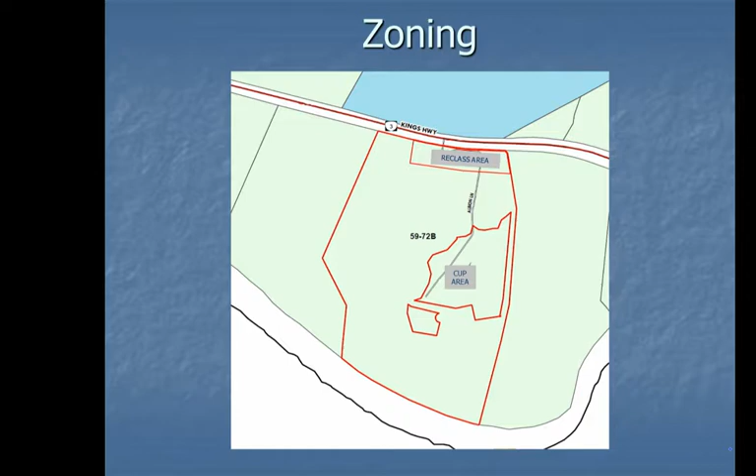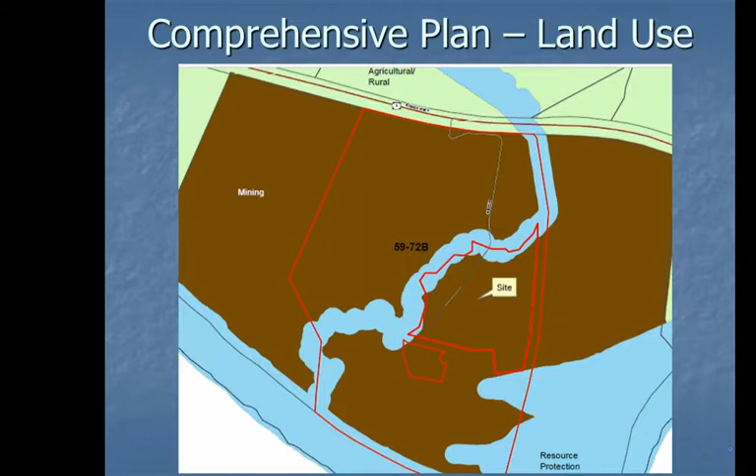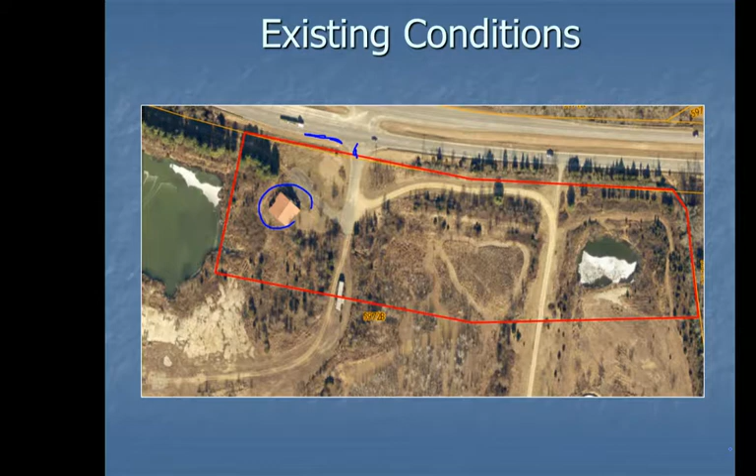Specifically with regard to the reclassification, this is a zoomed in view showing the existing entrance. Again, it's a commercial entrance that was constructed when a use was associated with this office building on the property. Kings Highway has a right turn lane into this primary entrance, and also a left turn lane for traffic coming from the east, along with internal access drives serving portions of the property for the sand and gravel mining.

You do have an existing retention pond on the site, the rezoning area site associated with the mining operation. Once the mining areas are reclaimed in the future, that pond is proposed to be filled in as the need for it goes away. The building I circled to the left of the property was constructed back in the 90s, and it's been vacant for quite some time, but they plan to reuse it for an office use.

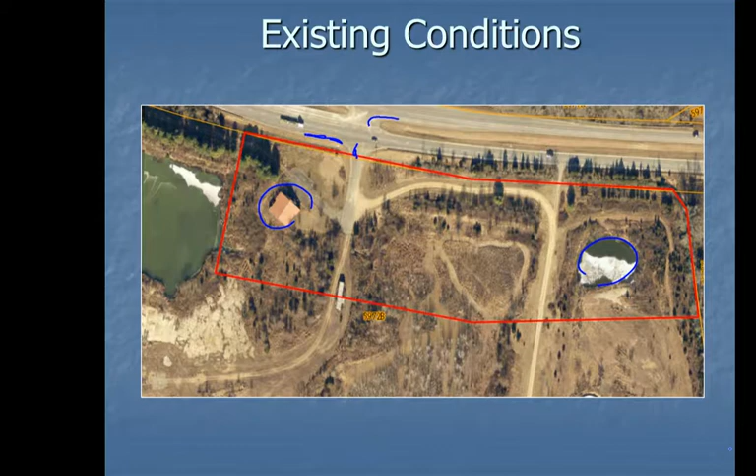I should have sent you this question, so if you don't know it, it's okay—how far is the closest well to this proximity, or is everybody pretty much on county water? I do not know the answer to that. Okay, so we'll have to look into that—maybe the applicant knows.

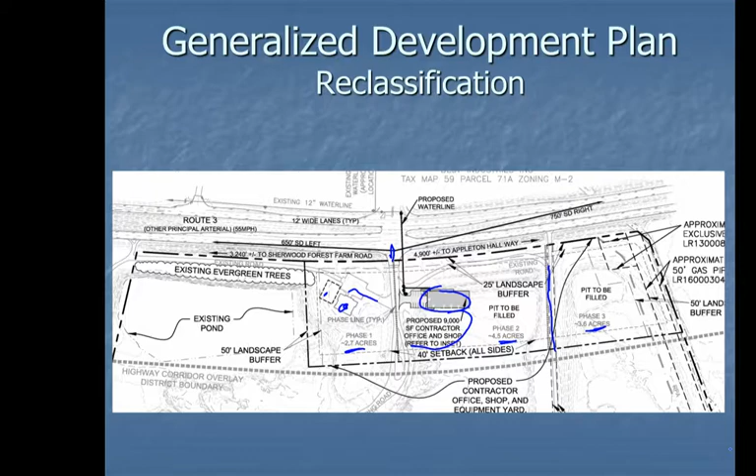One thing to note, the Albion Lane that cuts through the property, because you can't have residential access going through your industrial property, that road is going to be realigned with new access to the property to the rear and to the cemetery associated with the property.

There are several proffers the applicant is proposing, including the phasing of development, which will tie in with the timing of the mine's reclamation. The hours of operation are 5 a.m. to 8 p.m., or 9 p.m. during daylight savings time. It would be limited to 2 entrances, with the main entrance aligning with the median break as the primary access point. It would be proffered that no industrial or commercial traffic would use the secondary entrance, Albion Lane, which would instead provide alternate access to the residential parcel and the cemetery.

They're also proposing a mix of existing and proposed evergreen and deciduous trees along Kings Highway and the site perimeter, retaining those existing evergreen buffers, and screening any outdoor storage from Kings Highway.

The building would incorporate specific materials and colors, and the signage would have similar materials, colors, and designs. These would generally comply with the neighborhood design standards and the highway corridor standards. The building would also comply with fire protection requirements, and there would be an automatic defibrillator, or AED, within each building. The lighting for the outdoor storage areas would be directed away from the adjacent property and the highway corridor.

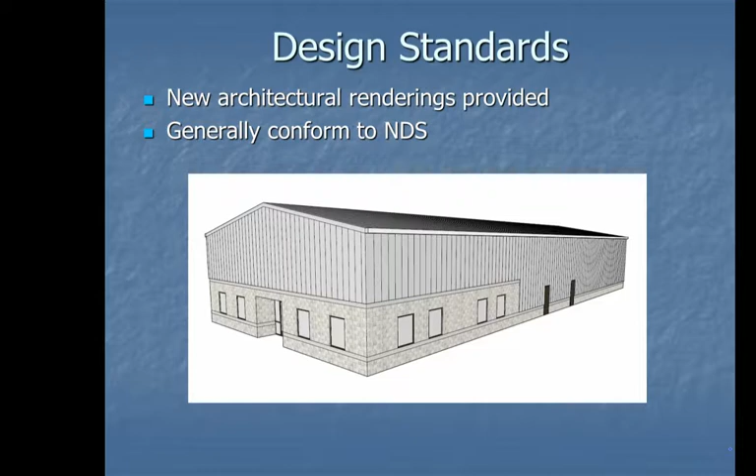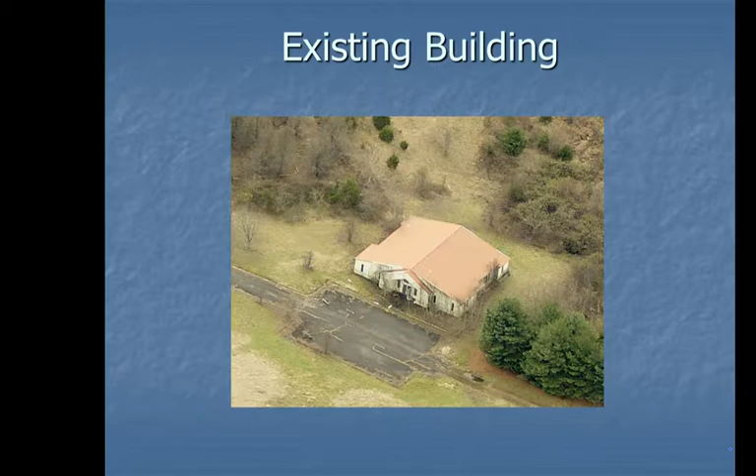Regarding public facility impacts, no impact analysis was required for this. The proposed development would have a maximum of up to 102 vehicles per day, with 9.6 a.m. peak hour trips and 10.2 p.m. peak hour trips, based on full development under the M2 allowed uses. The primary site entrance would be located at the median break, with turn lanes coming both eastbound and westbound. Utilities would connect to public water with a private drain field.

We find that the rezoning is generally consistent with the land use recommendations. The mining and extraction relates to M2 type uses, even though this use isn't specifically related to mining and excavation. It's consistent with the adjacent mining operation, and the architectural treatment of the building is consistent with the neighborhood design standards. We feel the proposed proffers would help mitigate any potential impacts.

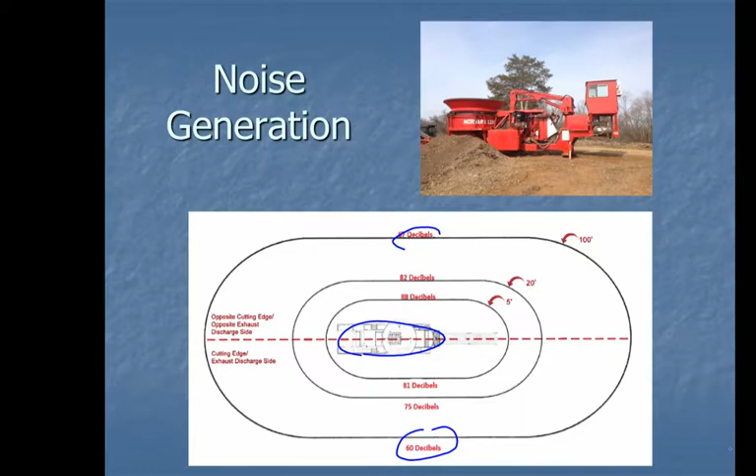The proposed conditions limit the areas as shown on the GDP with fencing of those areas, limiting the operation to one grinding machine being in operation at any time. In the instance there might be more than one grinding machine on site, there might be an instance where the machine breaks down and they bring in another one to replace it. So we're not actually going to limit the number on site, but the number in operation.

The hours of operation would be 8 a.m. to 4:30, Monday through Friday, with the mulch sales extending the same hours into Saturday. They would maintain the permitted noise levels under the ordinance. Again, the grinding machine would be no closer than 200 feet from any occupied dwelling.

Madam Chair, I have a quick question. Is that the storage of grinding machines, or is that an operating grinding machine? I'm sorry, could you repeat that? Is that for the grinding machines, no closer than 200 feet from dwellings? So they wouldn't even be able to store the grinding machine for temporary use within 200 feet, or would it be an operating machine? It would be the operation. Operation of a grinding machine within 200 feet. Correct.

Correct. Okay, you may want to make that clarification so that the opportunity exists for them to store it. Thank you. Okay, yeah, I will look at that.

The trucks are going to be limited to the primary site entrance and not the secondary, since that one is designed for trucks. The residential and cemetery access will be relocated, and then fencing would be provided around the cemetery in accordance with the ordinance.

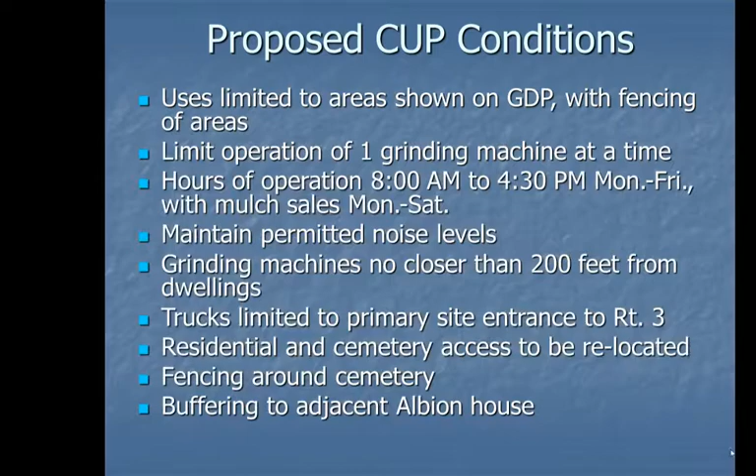So here's the house, and it would actually be realigned coming from this direction. It's going to the adjoining property, which this owner actually owns. And then the cemetery access would continue on from the same owner, continuing straight here.

Okay, thank you, that showed up on the large GDP. I guess I did not include it for that, so it would go outside the limits of the industrial area. Okay, thank you.

So let me see. Madam Chair? Go ahead, Mr. Randall.

Have we looked at the request? You mentioned that you had talked to this owner who had written this letter. She makes some suggestions on what she would like to see in that buffering area. Does that meet the county's requirements? Are we able to accommodate her request for the different types, or is she okay with whatever we put in there, as long as it's buffered?

She specifically stated evergreens and deciduous. I wanted to make sure that was within the county's code and that the county was okay with following her recommendations by her letter.

This isn't technically a requirement for the buffering because of the separation from the conditional use permit area, since it isn't abutting her property. So this would be more of a voluntary buffer, not necessarily following our required buffers. Okay, if that makes sense. Did I state that? Yes.

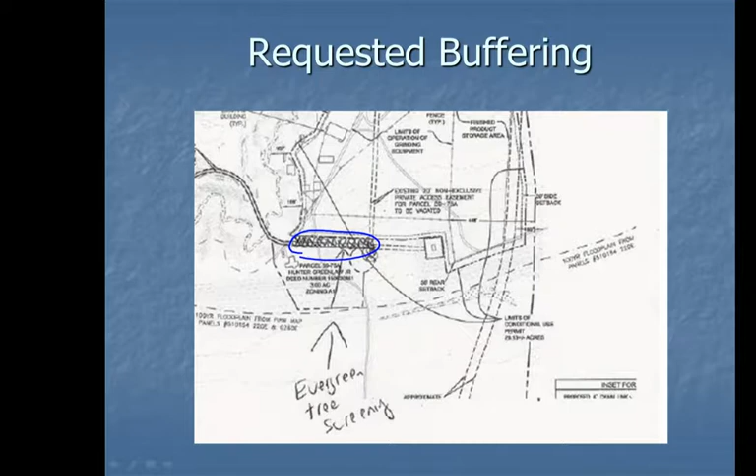Generally the same impacts for the public facilities, other than there are no utilities required for this conditional use permit area. And then, again, the same general findings that staff would recommend approval with the conditions, and if you choose to modify the conditions to include that buffer, we can work on some different language while the applicant is presenting.

Sorry to interrupt, this might come up during the site plan review, but will they be required to have silt fencing surrounding the entire mulching or tree grinding area? Or will there be any sort of erosion control maintenance during the entire operation?

I don't know, that's a good question. Do you know, Jeff, what would be required? Commissioner Bain, Madam Chairman, typically erosion control fencing is employed when there's land disturbance. In this case, you're going to have piles of material. There's no requirement that I'm aware of for an erosion control fence adjacent to a pile of mulch or some other type of material.

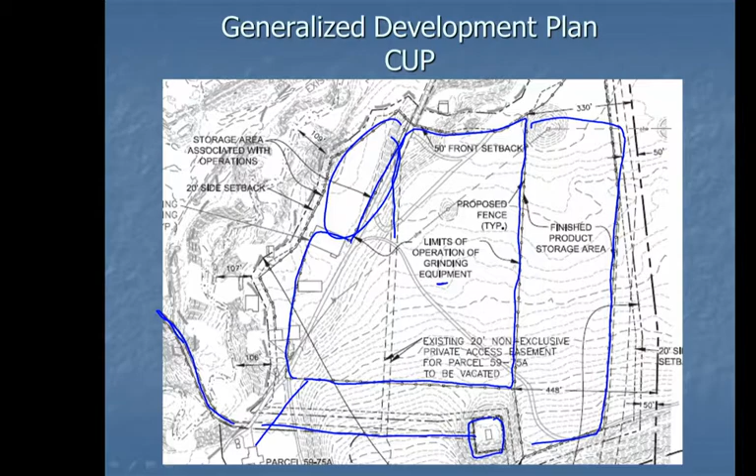Okay, if you would like it, you'd have to add it as a condition. I'm not sure. Mr. Apicella, to that end, can you pull up the visual on the site? And what's the distance of the mulch piles to the river? Let me go to... I'll have to pull up the... one of your first slides showed the river pretty good. That one.

Again, I don't know what the topography is or the slope of the parcel. Is there a concern, Mr. Bain, about heavy rains washing out into the river? This is actually a big knoll that goes along this area. I know that it's going to slope. This area sits lower, obviously, than that area. That's the floodplain down there, up here, because it is the floodplain area.

I'll have to look on the plan and see what the distance is, but I don't know how much. They can address it when they come up. Let me get to what your concern is potentially. I don't know what the potential pollution might be.

Might come from a pile of mulch, probably not much. I don't know, if you look at other landscape yards where they sell mulch, often they have them in their own containers, separated by type of mulch. There's one just down the highway, as a matter of fact, so they may have an answer for you.

Alright, okay, should we let the applicant come up? Alright, would you like to come on down?

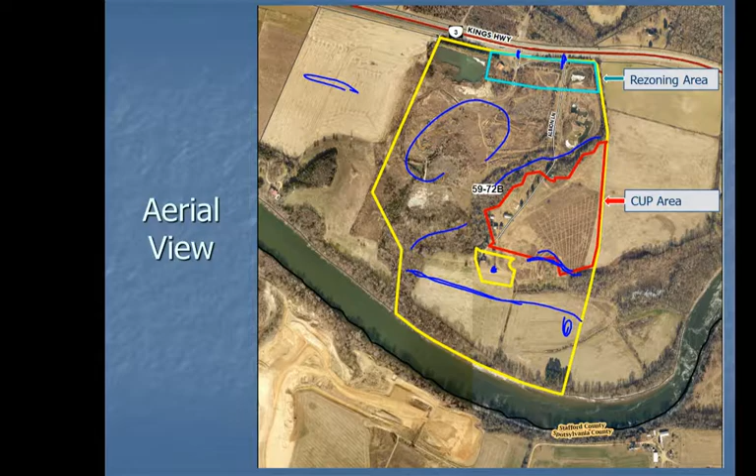And you don't feel obligated to represent any of the stuff she already showed. But I have to show that I did something to get paid. That might not be good now. I may have said too much already.

Hi, I'm Sherman Patrick, I'm with Compton and Duling. I'm here this evening representing Sisson Excavating. They are 35-year residents of Stafford County. Mr. Sisson is in the back of the room with Victor DeBoard, whom you may also know as a longtime business person in the county.

The subject proposal, if I could get the slides, is in fact 181 acres, the entire property we're looking at. That property has been used for quite a long time as a sand and gravel quarry or mine. I tend to say quarry because that's more descriptive, people understand that a little better. So they've been taking sand and gravel from the property. A number of different entities have operated it over this whole life of the project. The mine, the quarry activity began in 1961.

It did involve actually 3 parcels, or what are now today 3 parcels, and they showed up in the long-range land use plan map.

You saw this parcel, the 181 acres, that's being subdivided or will be used in part for rezoning and for the conditional use permit, and then there are parcels on both sides of it that have also been used for the same use. Those other two parcels have already been reclaimed and are back in agricultural production. This property would be reclaimed as part of the process of developing the industrial use that Mr. Sisson is now proposing on the very front of the property.

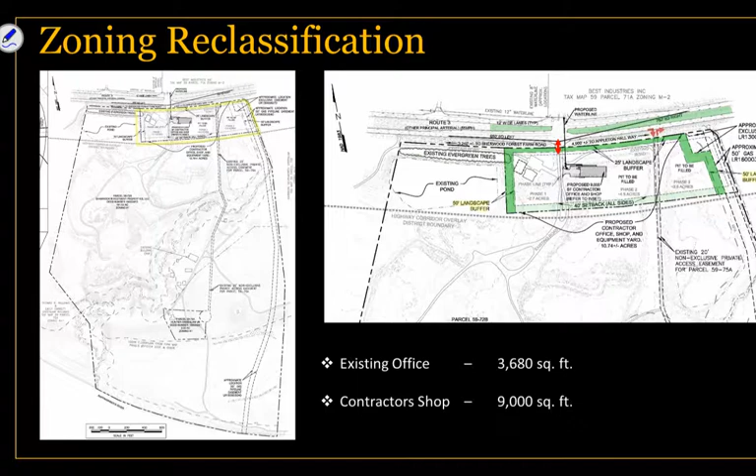These are the two buildings that'll be on the industrial property: the existing building—the aerial view is the same as what Kathy had shown you—and the proposed 9,000 square foot building.

The building is oriented so the overhead doors are on the back side, and you won't be able to see them looking toward the building, although there'll be a pretty heavy landscape buffer in front of it anyway. This entrance you see with the brick around it is actually the main entrance into the site and would be facing east, facing west.

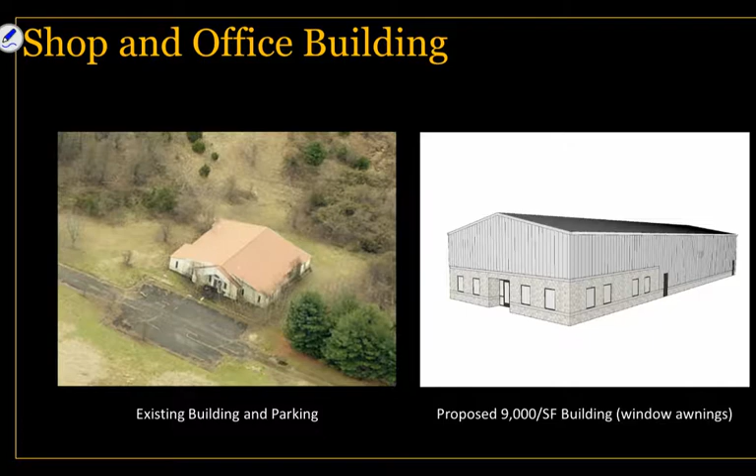We have it listed as Hunter Greenlaw Jr., that recently transferred, I believe, to his sister or another family member, and it's Ms. Williams. That is the property we've been talking about that would require some additional buffering and landscaping under the special use permit, additional conditions that were requested earlier.

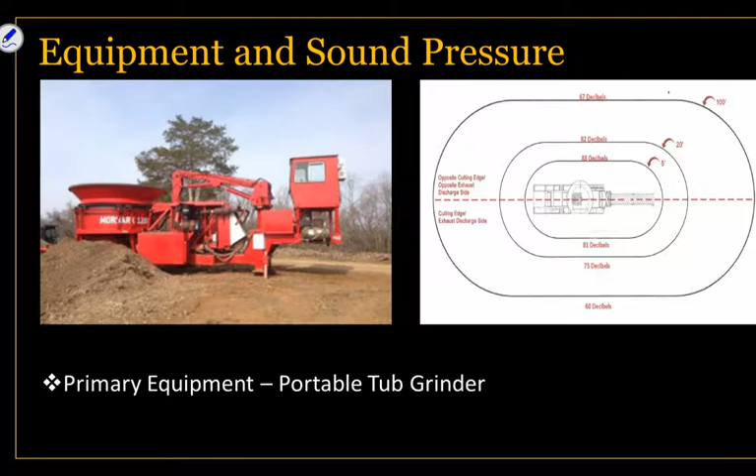A siltation and erosion control role or function in its own right. I tried to touch on each of your questions. If there are any other questions, there was one other about the distance to the well. The only well I'm familiar with is on the industrial property already, and that well would be replaced by the public water. I'm sure there's a well on the Greenlaw Williams property, so that is some distance from the mulch operation. The other residents are pretty well removed from the site itself.

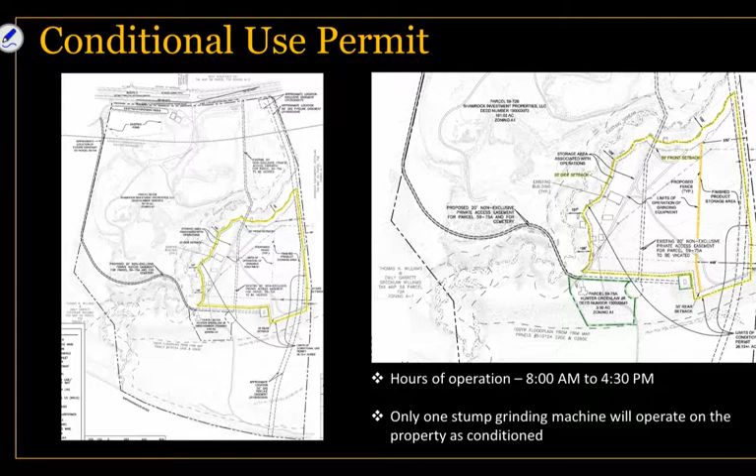If you have any questions, I would be happy to try to answer them. Any questions on this side? Any questions on this side? No? Okay, then I think we're good. Thank you. Thank you.

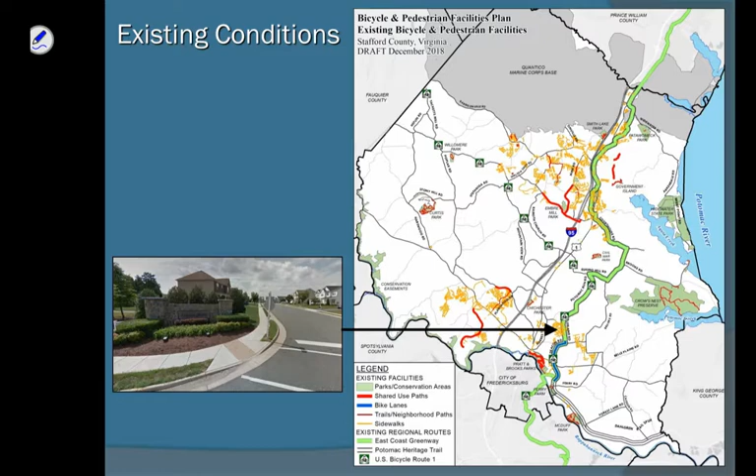Another thing we looked at was bike lanes that exist in the county, which is actually very limited. There's some on Deacon Road and Cool Spring Road, and this stretch is also part of US Bicycle Route 1.

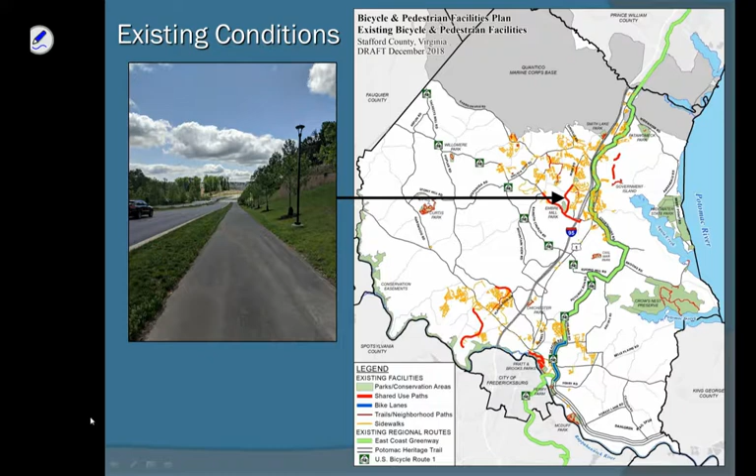We also looked at shared use facilities. These are facilities typically 8 to 10 feet in width, used by both pedestrians and cyclists. We have some on Mine Road, soon to be extended up to Austin Ridge Drive. We have a shared use path being constructed along Courthouse Road with a widening project. We also have shared use paths down in Celebrate Virginia on Celebrate Virginia Parkway, and a little on Truslow Road as well. And of course there's some within parks—for example, the Belmont Ferry Farm Trail is a shared use type facility.

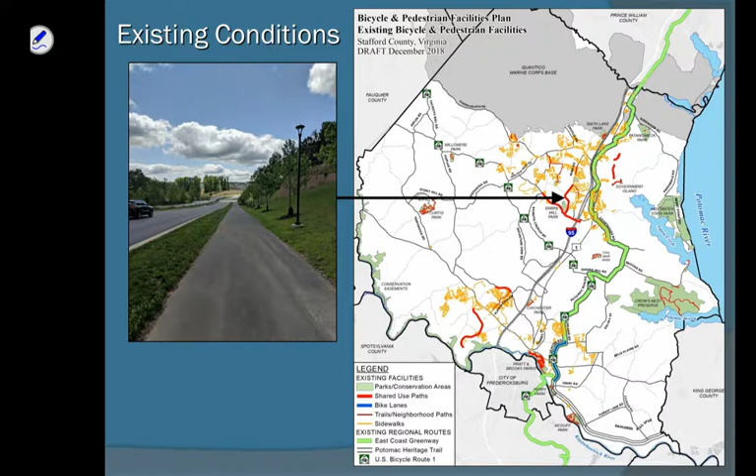I wanted to point out a few of the regional routes we're fortunate enough to have run through the county. One is the East Coast Greenway, a Maine to Florida route, and also US Bicycle Route 1, also a Maine to Florida route. A lot of segments of these routes follow the same alignment. However, the East Coast Greenway has a greater focus on providing more off-road type facilities, not associated or shared with travel lanes, similar to a bike lane, whereas US Bicycle Route 1 is a lot more on-road type facilities.

Another one of note is the Potomac Heritage National Scenic Trail, which runs through the county. This trail generally follows the Potomac River through Pennsylvania, Maryland, DC, and Virginia. The emphasis on that route is to provide more of a scenic type route and access to unique natural and historic points of interest.

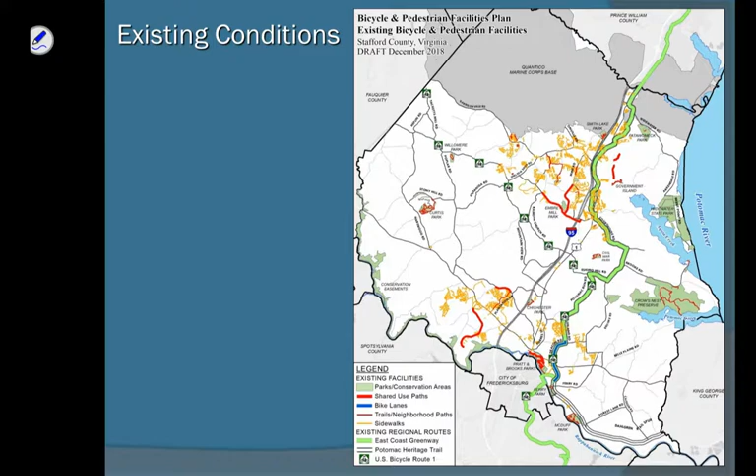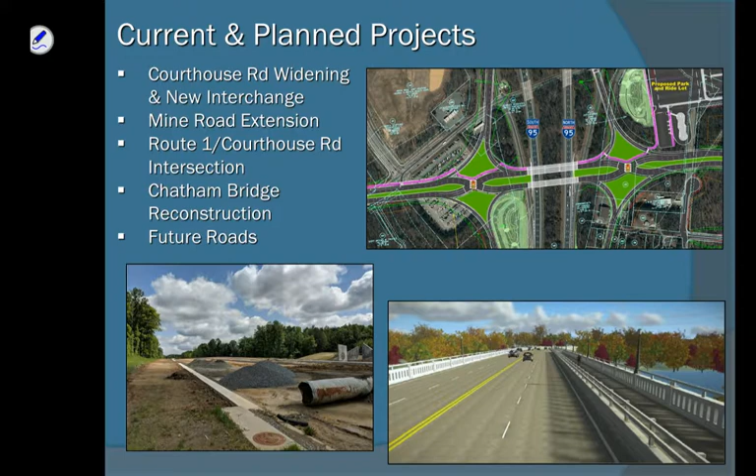We also looked at future roads called for in the county's comprehensive plan for this effort.

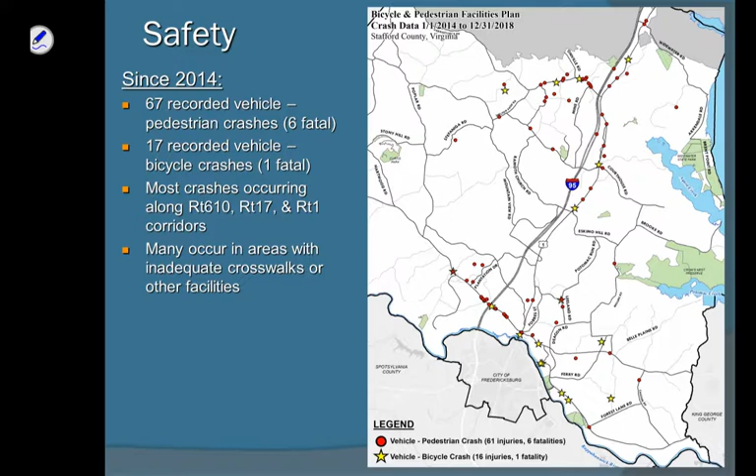Another thing we looked at was safety. This map shows vehicle-pedestrian and vehicle-bicycle incidents since 2014. The red dots indicate vehicle-pedestrian crashes, of which there were 67 since that date, 6 of which were fatal. The yellow stars represent vehicle-bicycle crashes, of which there were 17 since 2014, 1 of which was fatal. We noticed that most crashes occur along the more heavily developed corridors—Route 610, Route 17, and the Route 1 corridor—and that many of these occur in areas with inadequate crosswalks or other facilities, and just high traffic volumes in general.

We also looked at related planning efforts, starting with planning efforts for Stafford County, the first of which is the 2016 to 2036 Comprehensive Plan, which provides some general guidelines for provision of bicycle pedestrian facilities, and also identifies future road needs, including upgrades to existing roads. So we tried to marry up the recommendations of this plan with those recommendations, because we see one of the biggest opportunities for providing these types of facilities with future road construction or upgrades, since you're there doing the work already and have economies of scale.

Again, we looked at the 96 Stafford Bicycle Pedestrian Plan, which provided some recommendations. You can see here there are two really different types of recommendations represented by the red and black lines. There are 58 miles of new facilities proposed with this plan, depicted in the black lines, and 24 miles of existing facility upgrades depicted with the red line.

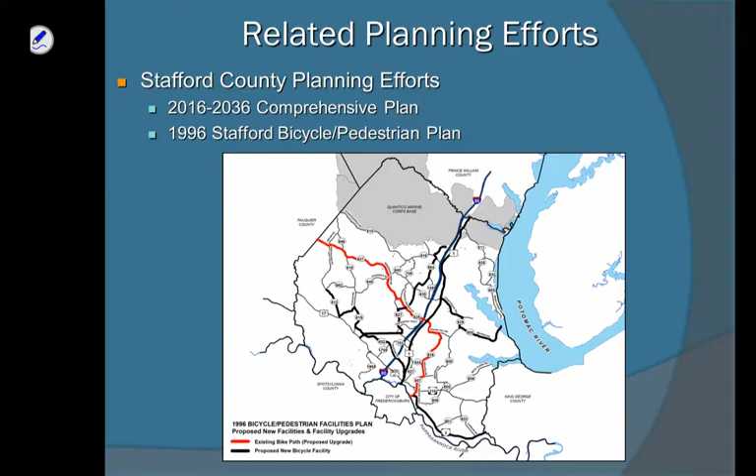We also looked at planning areas and how they relate to the recommendations of this plan. One of note is the courthouse planning area, where within this area we have the vision for developing a new downtown Stafford, and one of the major objectives of that is to create a bicycle pedestrian friendly environment, recognizing that the success of that development really hinges on the ability for residents to access it by ways other than a vehicle, including connections to adjacent neighborhoods such as Embrey Mill.

We looked at the Economic Development Strategic Plan, which has objectives for promoting mixed use and walkable gateway areas. We've had a lot of great discussion with economic development throughout the development of this plan, and we really see the benefit of implementing a plan like this from a perspective of economic development, because it can help make the county more attractive for businesses and residents.

Another county plan is the county's strategic plan, the 2040 plan, which has objectives for reducing road congestion and improving safety along roads, and also for promoting the county's recreational facilities. So we definitely see some correlation in this plan's recommendations and how that can serve to benefit the overall strategic objectives of the county.

We looked at the FAMPO long-range transportation plan also, which was updated recently. This plan includes recommendations for the whole George Washington region for bicycle and pedestrian accommodations. So we wanted to acknowledge the recommendations of that plan, but also expand upon them, because this plan is a little deeper dive into specific Stafford County needs.

The Virginia Outdoors Plan we looked at, which is really the state's guide for outdoor recreation. There are certain recommendations of that plan which correspond to the recommendations of this one, for instance the objective to expand the East Coast Greenway.

We also looked at VDOT studies. We had the STARS study for the US Route 17 business corridor, which is more of a plan that would incorporate safety improvements both for motorists and for pedestrians and cyclists. So that more granular level plan should be used to supplement the recommendations of this plan. We also looked at what adjacent jurisdictions recommend and where their proposed connection points are with Stafford, because we definitely wanted to link up those points and make sure we have good connectivity across jurisdictions.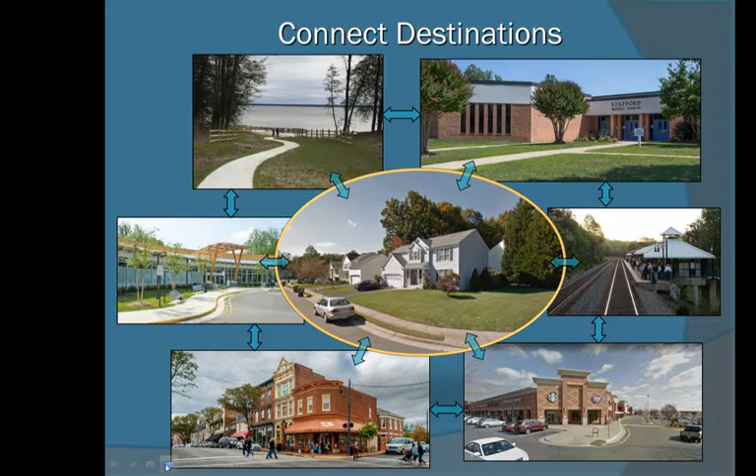Central to the strategy is connecting all of these destinations with residential areas so that you can complete these trips without having to get in a car.

We'll note that with the shoulder improvements, a lot of the more major secondary roads in the county are slated for shoulder improvements at some point, but the ones highlighted in this plan are the ones we saw as more of a priority for rural area cyclists, based on what we heard from stakeholders and the public.

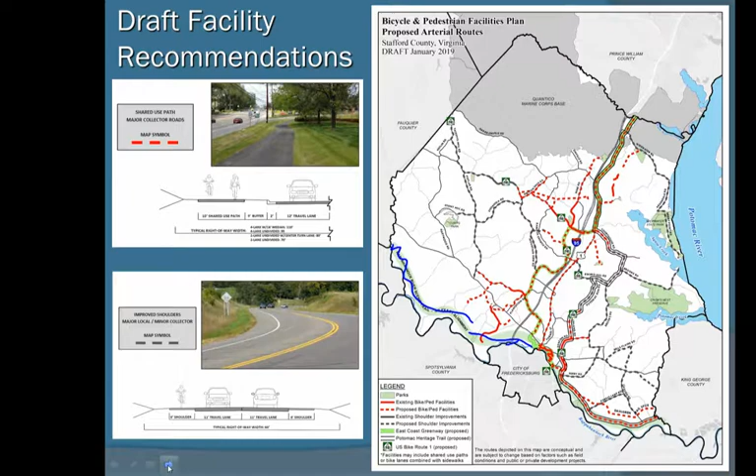This is not ideal in some cases because in a lot of cases these easements overlap individual residential lots and neighborhoods, making it pretty difficult to come back in and get an overlaid easement for pedestrian access when dealing with individual homeowners. But certain stretches, such as the one that generally parallels Courthouse Road from Mountain View over to Austin Ridge Development, are a good example of an easement stretch that does not overlap individual residential lots. It mainly overlaps common areas within developments and some county land, which we identified as good potential for a shared use facility off of the road.

On the southern portion of that map, there's a red line that goes where the 95 interchange goes off the map on the bottom, and it goes off to the left and rising, with the symbol US Bike Route 1 on it. What road is that? That's Courthouse Road. Ah, okay, all right, so I thought that was 610. I could not get my bearings.

The solid lines represent existing facilities. This isn't technically existing yet, but this stretch, the shared use path here, will be provided with the Courthouse Road widening and the new interchange, as well as this stretch here on Mine Road, so we went ahead and showed it as existing.

So Brian, will there be a separate 6 to 8 foot bike path on the Courthouse Road widening? Along Courthouse, it's a 10-foot shared use path. It's along the road, but there's a grass buffer between the actual road and the path, so it's not like a bike lane. You have the road, the curb, then a little buffer, and then the 10-foot path, similar to the one on Mine Road.

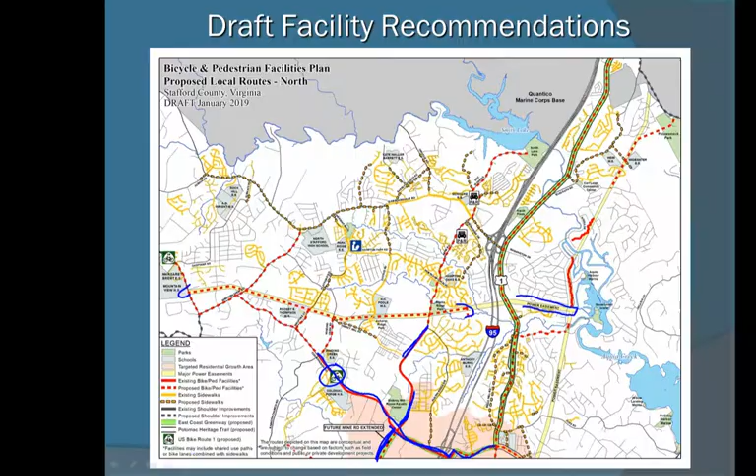For implementation, you may have noticed in the proposed resolution R19-135, we are recommending a couple of minor additions to the county comprehensive plan to reference this new plan. We do acknowledge that these recommendations need to be incorporated into future special area plans.

We also want to take a look at our ordinance requirements and make sure we're providing these adequate facilities. I will note that currently the ordinance does require that any facilities shown on the comprehensive plan be provided. So whenever a subdivision or commercial development comes in, once this plan is in place, they should be required to provide these facilities through their section of development.

We also want to work with developers to construct these route sections through new residential or commercial developments, such as when a rezoning comes in, we'll definitely base recommendations on this plan. We want to incorporate facilities into road construction projects and other linear infrastructure projects, such as a new sewer line, which can have traits that facilitate trail development. One recent discussion was the utility extension through the wayside, and whether that could be used for trail development also.